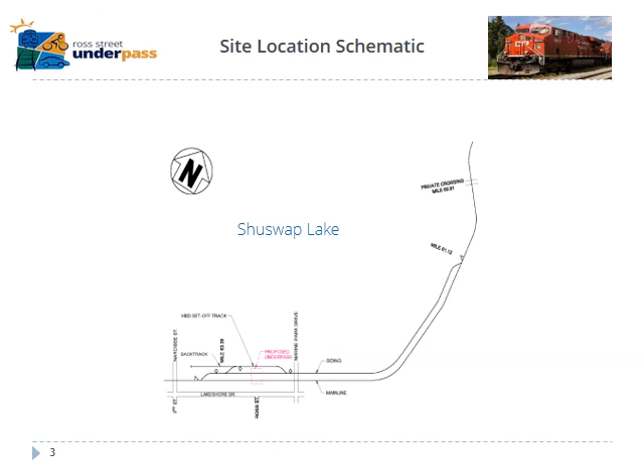This is the limit of construction for the project, and I show this really just to demonstrate that it's a much larger construction area than just the underpass location itself. So there will be a bit of disruption that happens, and we'll talk about that a bit later on.

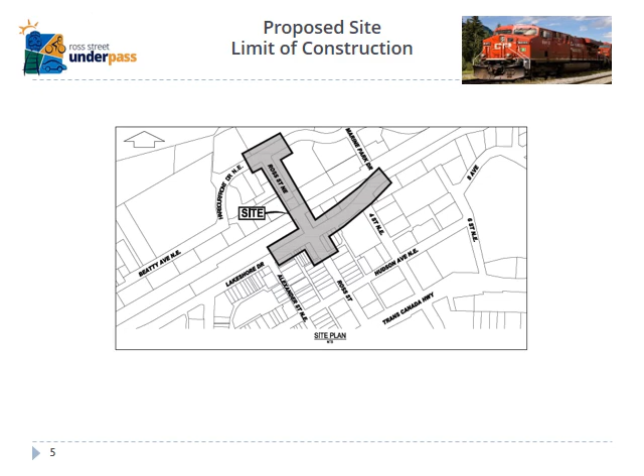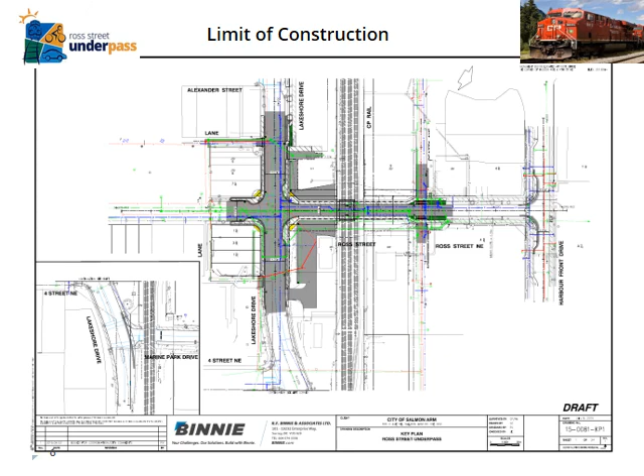This is a blow-up of the limit of construction. And this is an important slide because it shows some of the changes that are going to occur with the underpass project. For example, Ross Street, north of the underpass, is going to have no parking on either side. And also on the right-hand side of the screen, you'll see that there will be no parking on the north side of Harbourfront Drive. And why is that? It's because people that are going to be traveling to the waterfront, pulling boats and trailers, need room to pass. And with the parking that exists today, that simply is not possible.

What we also show there on the bottom half is that the existing CP building is going to remain, and that is not part of this project. It's going to remain for the foreseeable future unless we come to some other agreement with CP Rail in the future. To do otherwise with that building would add a couple million dollars to the project, and it's simply not something we're looking at right now because CP needs to have a building to maintain their operations.

The bottom of the screen, you'll see that at the intersection of Lakeshore and Ross Street, that it's going to be a four-way intersection, and there's not going to be a traffic light at this time, although that may occur in the future.

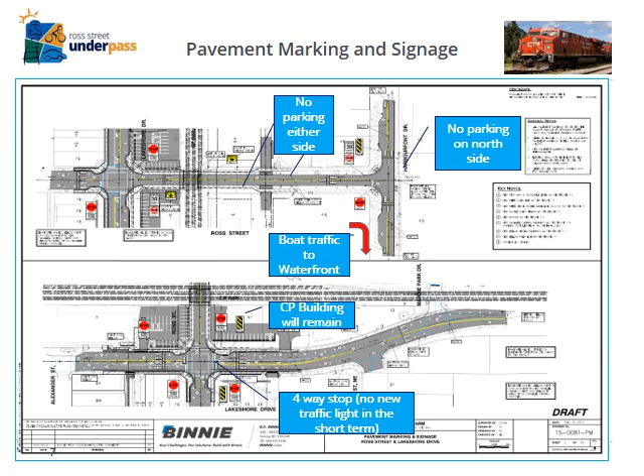Just providing some more context about the project. The railroad was constructed a long, long time ago in 1885. And the concept for the Ross Street Underpass was developed in the early 1980s. So it's not a new idea. There are successive councils that have talked about it and endorsed it over the many years. It's going to provide improvements to safety and access to the waterfront. It's been included in the downtown revitalization plans of the city for many, many years.

Of course, there have been several petitions over the years to City Council, both in favor and opposed to the project, and it has been somewhat of a divisive issue over the years.

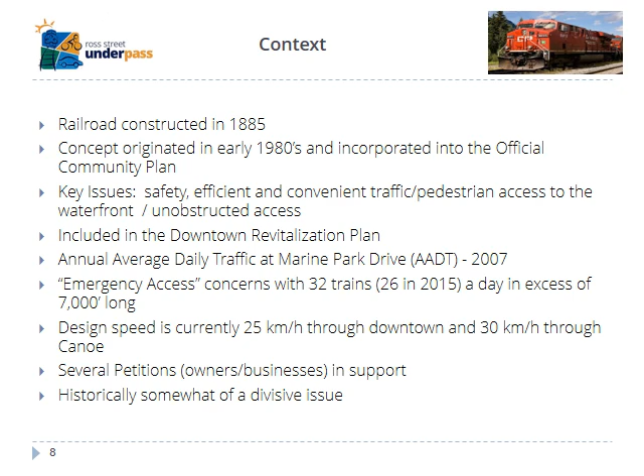I'm often asked what alternatives have we looked at, and we've looked at many of them over the years. For example, 5th Street Southwest, 6th Street Northeast, Shuswap Street. Some of them perhaps with not as much rigor as we've done with the Ross Street Underpass, because the more that you study these other alternatives, the more that you'll see that they're simply not feasible from an engineering, land acquisition, or financing perspective, and that the Ross Street Underpass really is the only and the best option.

For example, this is 5th Street, where we've looked at going over the Trans-Canada Highway. Of course, that's M&M Meats on the right-hand side. Some challenges with that location is that you would need to go over or under the Trans-Canada Highway and Lakeshore Road in order to get to the waterfront. It's really not feasible from an engineering perspective. And even if you were able to do that, on the north side you find Beatty Avenue, which is a bit substandard at that location. And you would end up trying to enter the waterfront from the western periphery, as opposed to going into the heart of the waterfront at Ross Street.

We've looked at an overpass at 6th Street, which we looked at in 1987. The cost of that at that time was estimated at $1.7 million, but it's really not feasible from an engineering perspective.

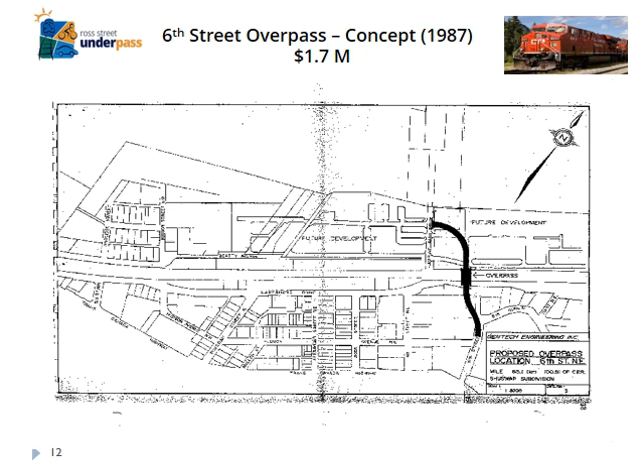This is an example of what that alternative would entail. Of course, that's McGuire Lake on the right-hand side, and it's a very narrow local road. More importantly, though, there are major developments and major property acquisition that would be needed to go straight down across the tracks from there, and it's simply not feasible at this point in time. There's also the issue of the aesthetic impact of what would likely be an overpass at that location.

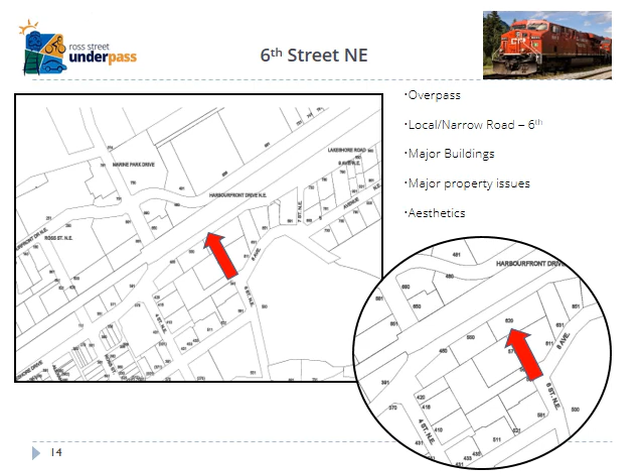We looked at 10th Avenue, which is sort of down from the health unit, and that option does have some possibilities, but really 10th Avenue is a residential road at that location, and there would be major environmental impacts on the north side of Lakeshore Road. For example, that's where the Raven Trail is, and there's some environmentally sensitive areas.

We've looked at 10th Street Southwest, but there are many challenges with that location. You can see it goes through, of course, Adams Lake Indian Band properties, and really there's no access to the waterfront even if you were able to get to the north side of the tracks.

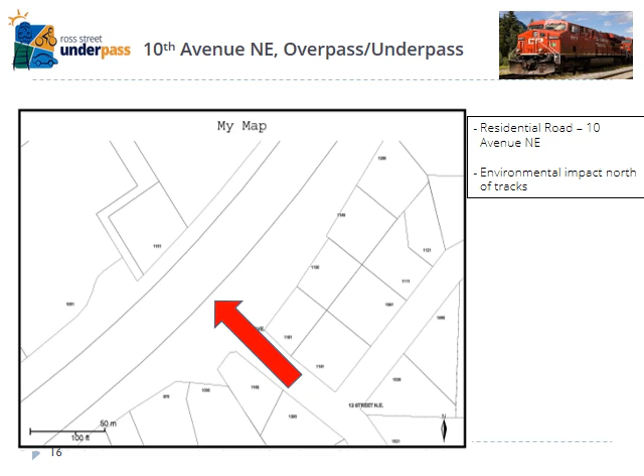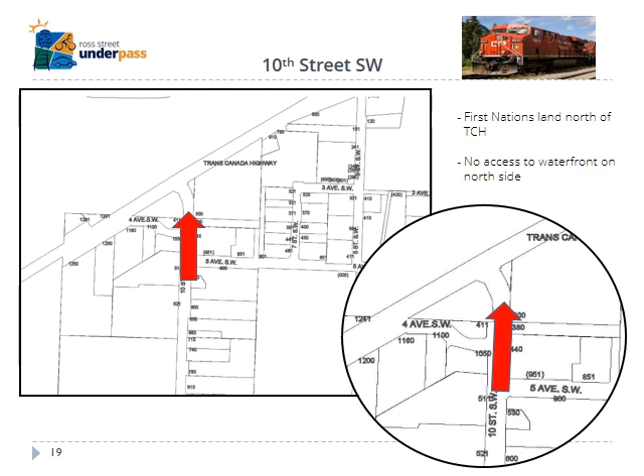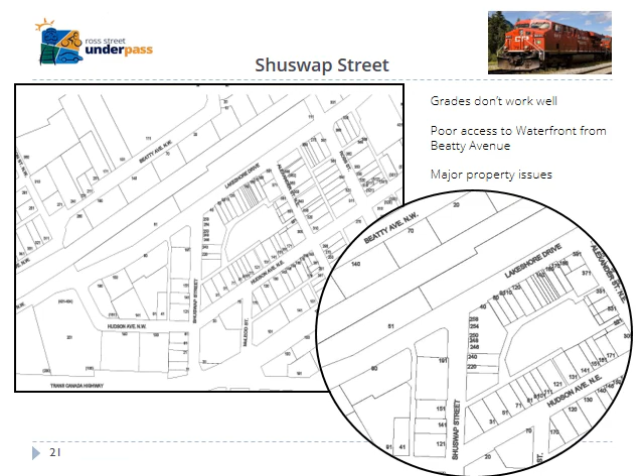So the point of this is that we have looked at many alternatives and without fail come to the conclusion that Ross Street is the only option.

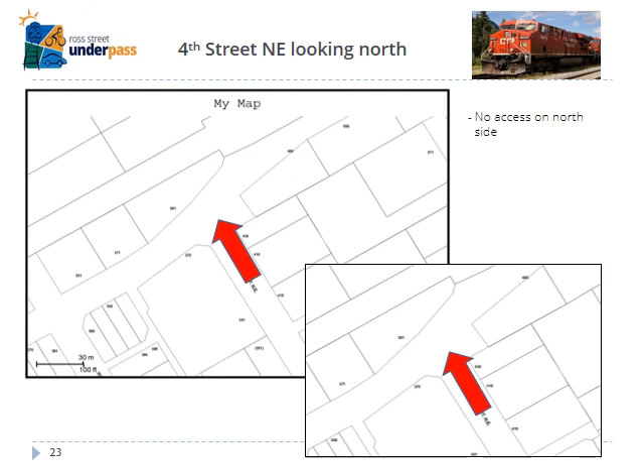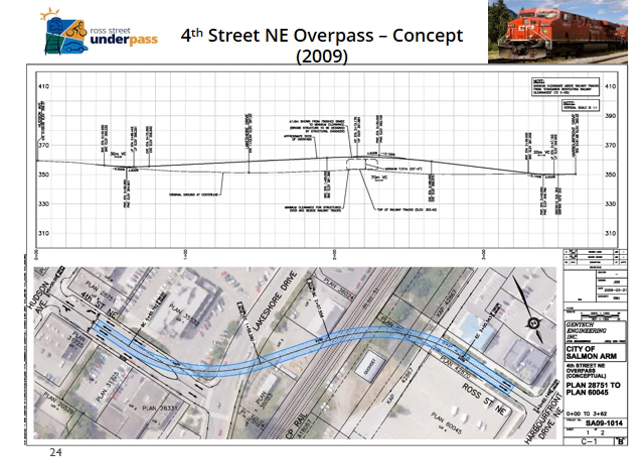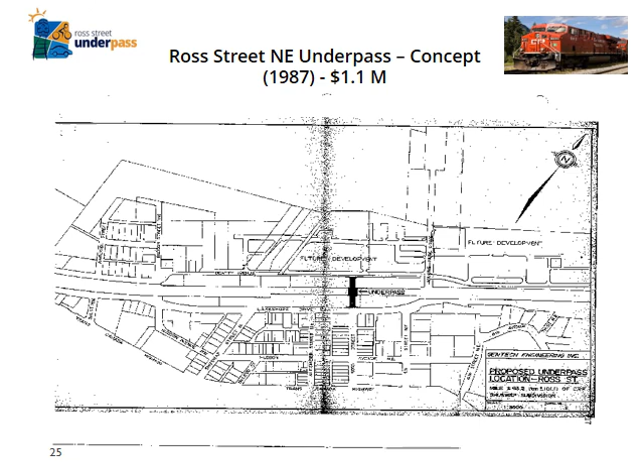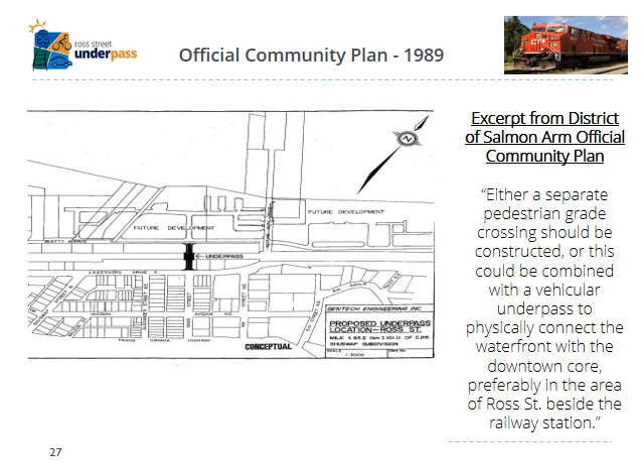This is just showing the location of the Ross Street Underpass. It's been in our official community plan, as I mentioned earlier, since the 1980s, really, and it's in our present official community plan, if you're one of those people that like to study that sort of thing. It's also in the city's corporate strategic plan, which was done a couple of years ago and endorsed by council. And as you'll see a bit later on, it's included as well in the city's long-term financial plan and debt strategy, and I'll speak a bit later as to what that means.

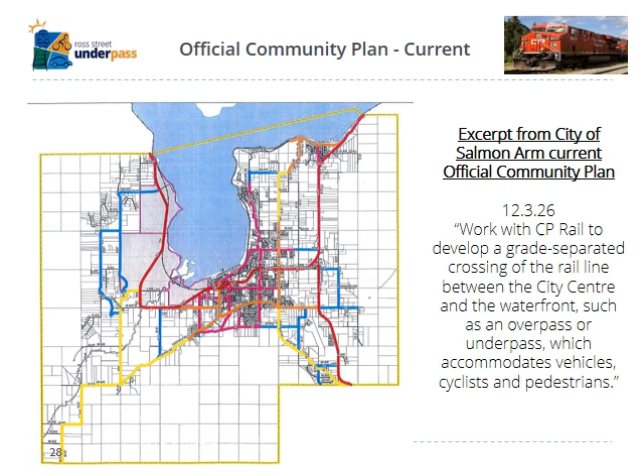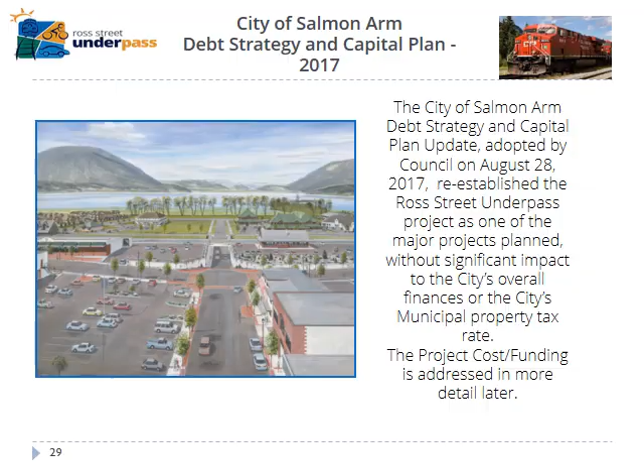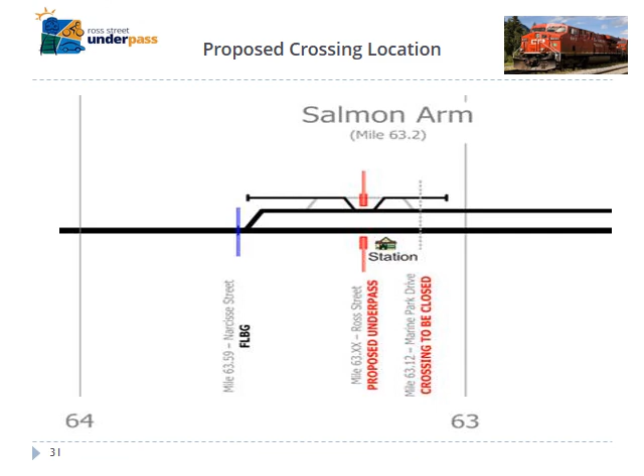Talking about some details, if the project goes ahead, a maintenance track is going to be provided for the project in Tappen. There's going to be what's called a 2-track Shoofly diversion, that's the red lines that may be hard to see on the right-hand side. So what it means is the tracks are going to be diverted around the construction area to allow the underpass to be built. Shoofly is another one of those funny CP terms that Mike may speak to later.

Hot box detector - that's a location that exists today where there's a set-off track where trains in trouble for mechanical reasons or whatever it may be are able to get off the track and park, so CP can drive up with their vehicles and do whatever repairs need to be done. So there's a hot box set-off track and detector there today, which is kind of close to Gibbons Motor Toys on the south side. As you'll see a little bit later, that hot box set-off track is going to be moved east of Marine Park Drive.

The cost estimate for all of these things associated with construction is about $2.8 million, and that's one of the reasons, which we'll talk about a bit later, for the price tag of the project.

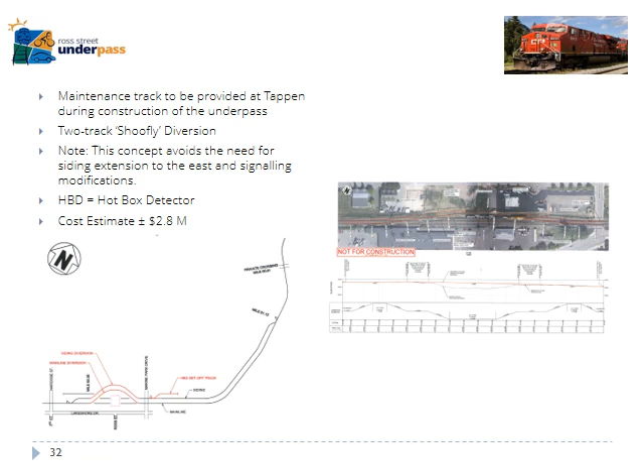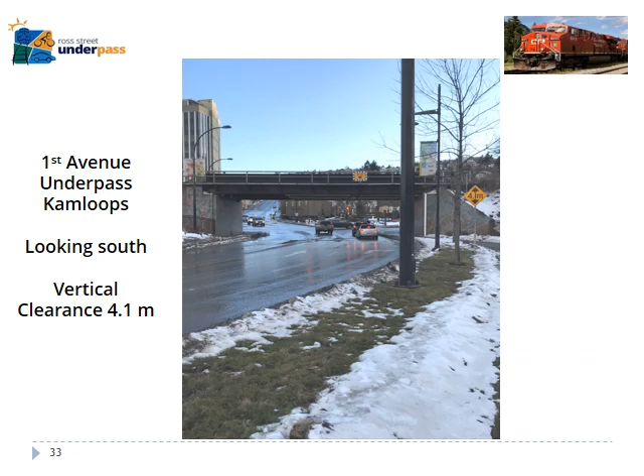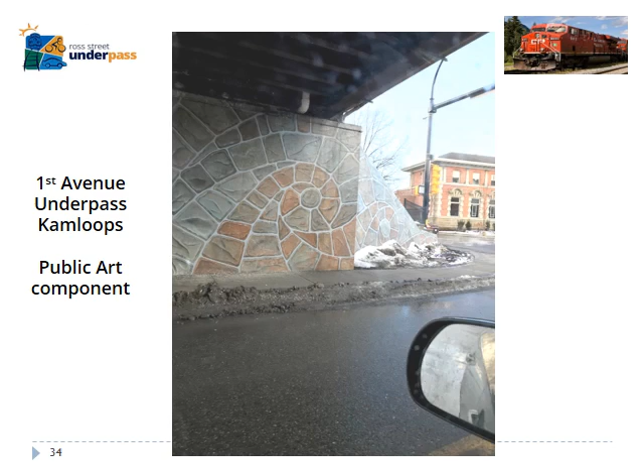Now, if the project does not go ahead, there are a number of risks and implications for the city. For example, you may have read in the newspaper recently that Transport Canada, which is a federal organization and has sweeping powers in this sort of thing, is telling us there's a potential closure of Marine Park Drive and other crossings in the area if the underpass does not go ahead. There was a grade crossing assessment that the city completed at the request, or demand really, of Transport Canada, which was just finished a few months ago. And it has a big price tag associated with it, which I'll talk to a bit later.

There's lots of other cities struggling with this issue right now, and Transport Canada has forced many of them to hire flaggers and make traffic pattern changes at great expense. The report I'm referring to also talks about the necessity to put in signalized intersections at Marine Park and Narcisse, which is the other level crossing west of here, and the price tag for that will be in excess of $1 million. And of course, we would be left without an underpass. There's also the potential for a catastrophic accident at the Marine Park Drive crossing. Heaven forbid, but I've personally seen many close calls there over the years.

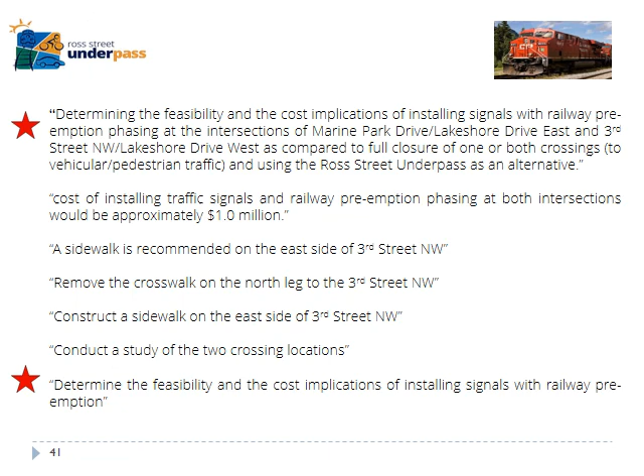A few examples of other cities that have had to make major changes to address Transport Canada requirements. For example, the city of Kamloops has had to hire flaggers to stand at the tracks day and night to the tune of tens, if not hundreds of thousands of dollars. And that's despite the fact that Kamloops has a pedestrian overpass. But the fact is that some people don't use it because it's a longer walk and they cross illegally underneath it. Transport Canada has required Kamloops to put flaggers there.

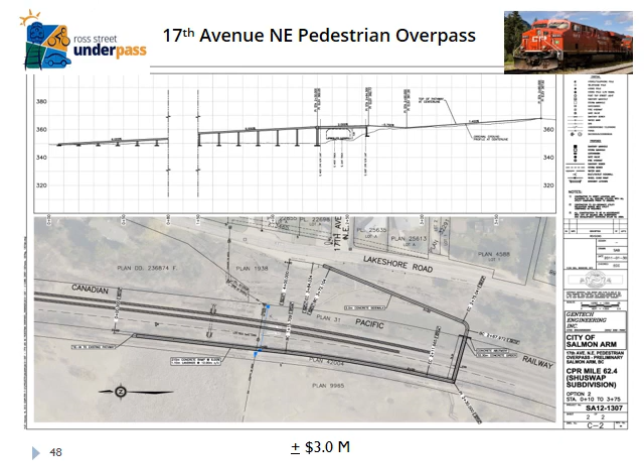The design work for the project is at the 90% stage, and the consulting engineer is Binnie and Associates, who are located in the Lower Mainland, and are experts in the field.

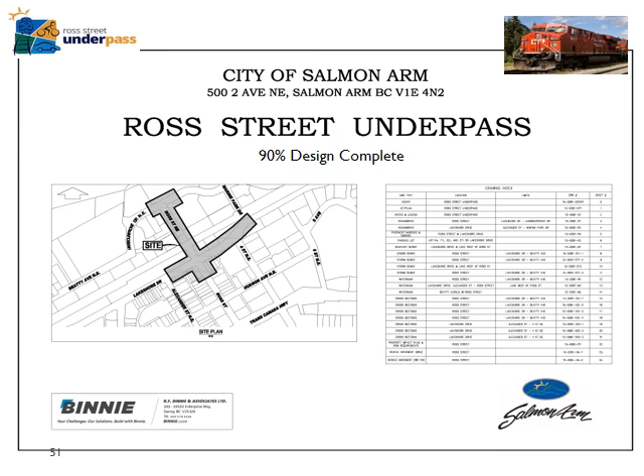Some important design elements about the project if it were to go ahead. The low point is 346.8 meters. All vehicles will be able to pass underneath, including transit buses, fire trucks, etc. Of course, pedestrians will be able to walk under the underpass, as well as cyclists. There's a potential for a public art component, and there are major stormwater improvements that are going to occur.

This is just showing some of the details of the design, which obviously you can't read from where you're sitting, but just to demonstrate how far the design has proceeded.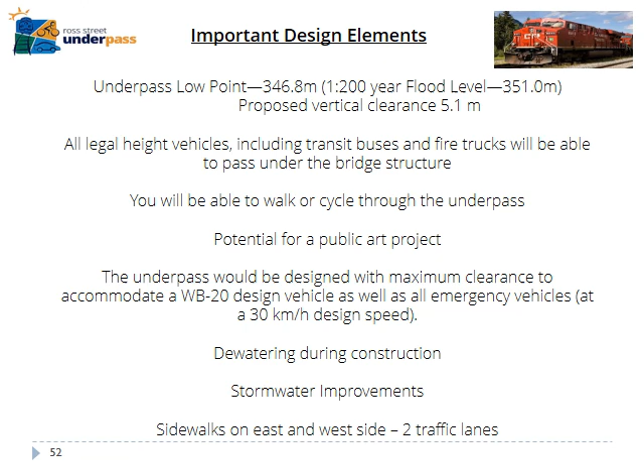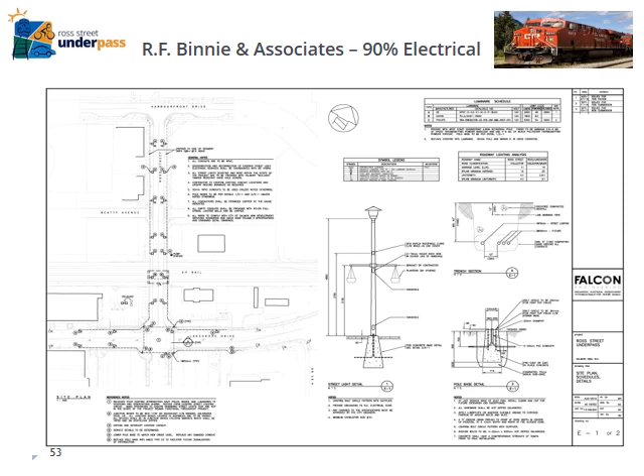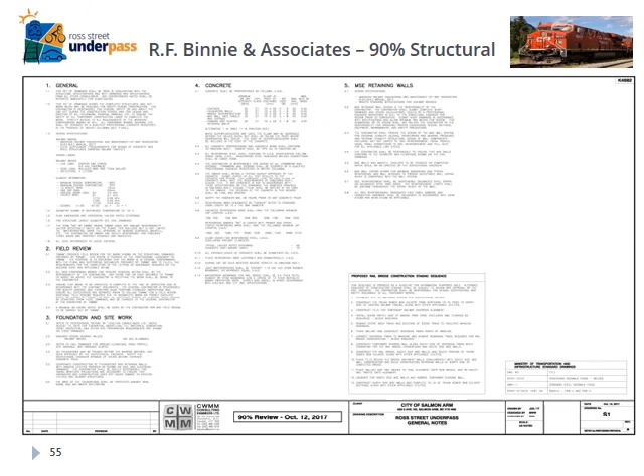The storm sewer system is going to be relocated west of where it is today, because where it is today is exactly where the underpass will go. And the city has been actively securing the rights of way that are needed for that to occur.

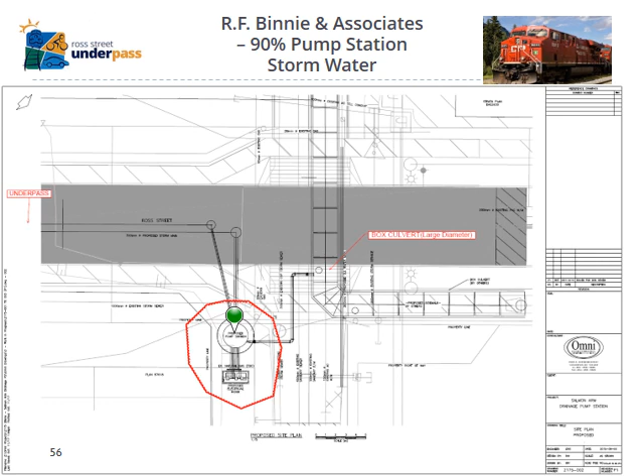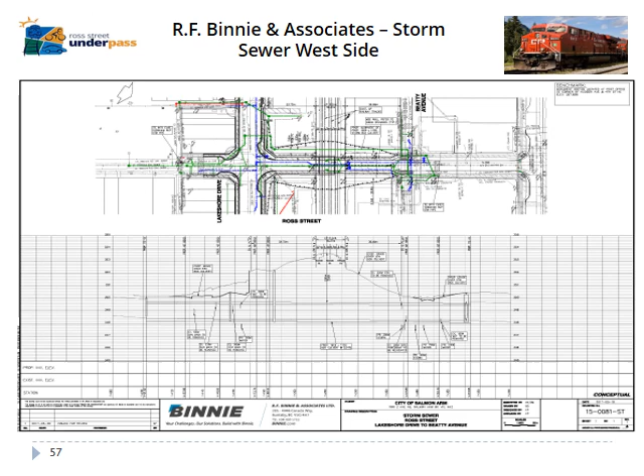The improvements that will occur with the pump station, etc., will help to rectify this situation. I'm not saying it's going to completely eliminate it, but it's certainly going to improve things. And the flooding we see there in recent years, important to note, is not from Shuswap Lake. It's from the stormwater system being overwhelmed. If we get flooding in this area because of Shuswap Lake, then we have much bigger problems to deal with.

And if the underpass has water from whatever source, then the city would simply put barricades up and close it down for a couple of hours while the storm system does its thing. There are lots of underpasses on the prairies which are flooded all the time.

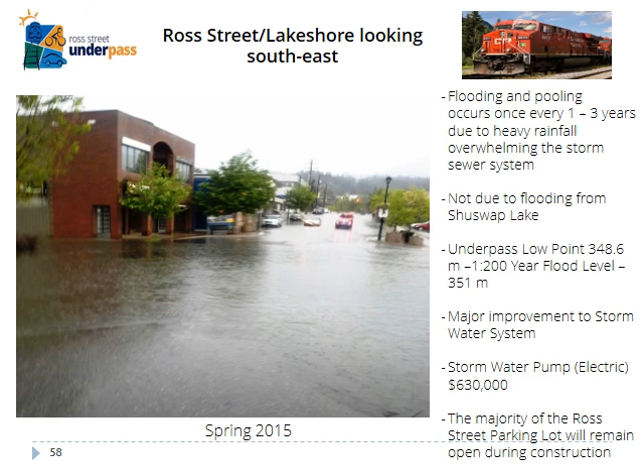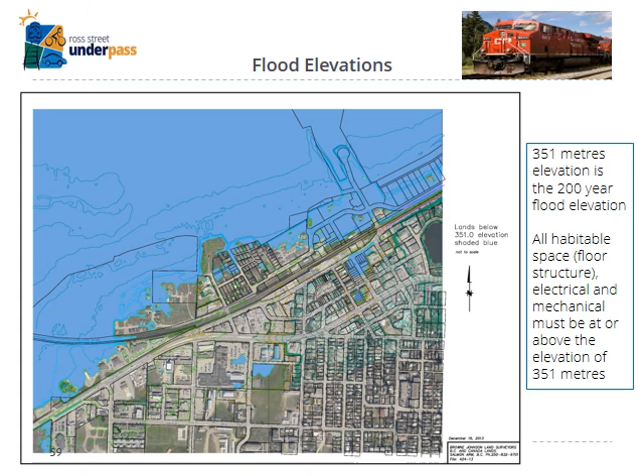The cost of the project, you can see, is $12.368 million. That includes a $630,000 stormwater pump system that we talked about earlier. And as I said, the price has gone up over the years and is going to continue to escalate if we don't do the project.

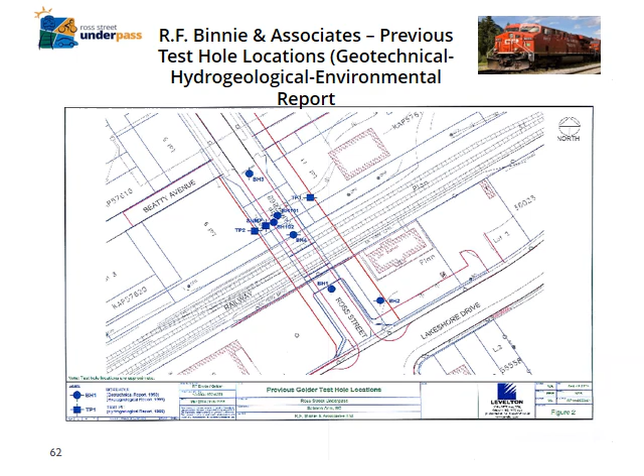Project funding, as I said, the city has obtained funding for more than 50% from other sources, including the gas tax, Transport Canada, a generous contribution from CP Rail of $1 million, and long-term debt projected at $5.1 million, which I'll talk about a bit later.

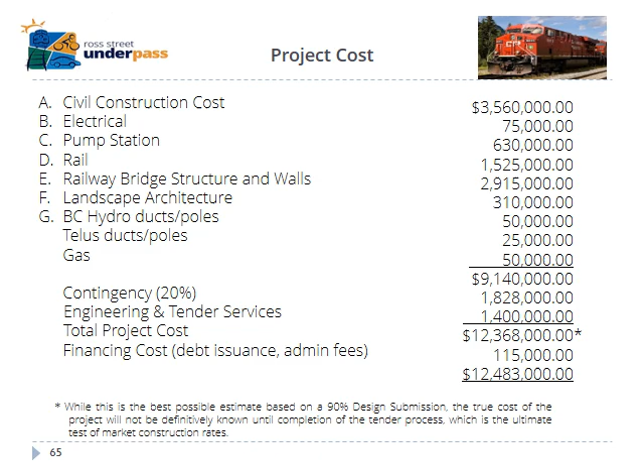The long-term debt, $5.1 million, the debt servicing cost of that - in other words, what the city has to pay the bank back to borrow that money - is $316,000 a year. And there will be no tax increase to pay that money back.

And how can I say that so confidently? It's because we have debt on the Shaw Center being retired, or paid out, in July of 2019. And the cost of doing that today is about $450,000 a year. So what we're going to do is simply use those funds to pay off the Ross Street Underpass instead.

So, I like to say, it's baked into the city's financial cake already. These costs are subject to change, and I'll talk about that a bit later.

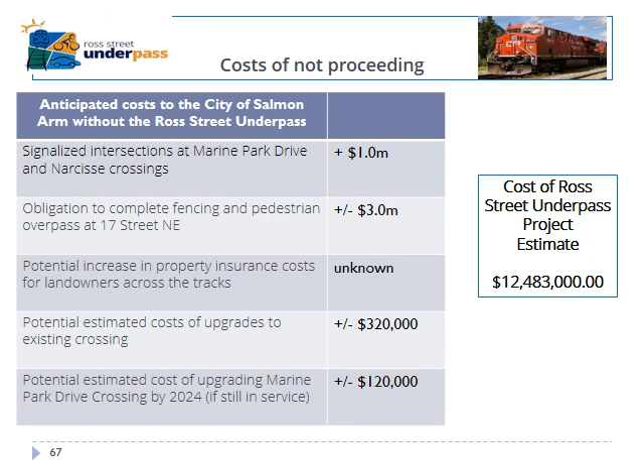Now, in order to do long-term borrowing of about $5.1 million, the city is going to be required to either do a referendum or conduct what's called an alternative approval process. And we're required by law to do that, as are all cities in the province. We can't incur debt without getting the approval of the electors in some way.

Provided that it's over a 5-year term. So if it takes more than 5 years to pay it back, we need to get approval of the electors.

At this point, all signs are pointing to the fact that we're going to have a referendum in October of 2018 in conjunction with the local government election. Now, that has not been finalized yet, and council still needs to ultimately vote on that course of action, but it's looking like that's what the city is going to do at this point.